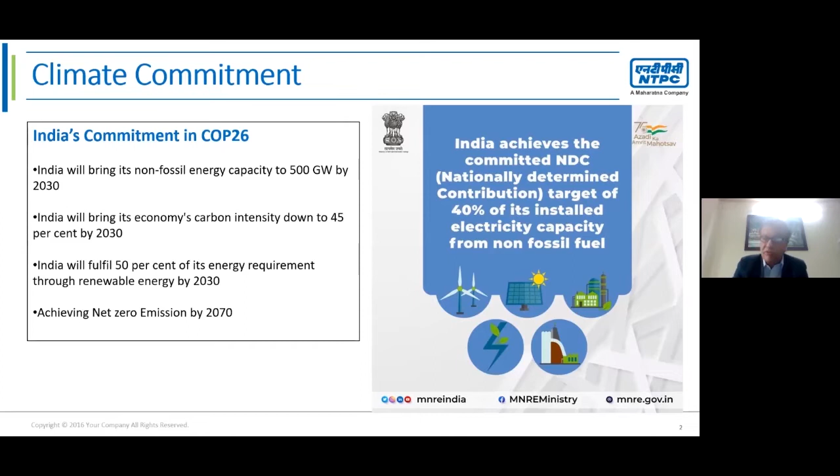Now, if we see the two charts, on 31st December 2021, we have a capacity of 392,017 megawatt of plant all over India, where 53.4% is coal, and solar, hydro and wind together come to around 40%. So that is the point. For renewable energy, we consider hydro also.

And if we see the right side, 2030, in a 10-year period we'll have a total projected capacity of 817,254 megawatt, out of which coal will be around 32.7% odd, and solar and wind will take a huge chunk. So that is the target.

So the challenge is that solar and wind are highly unpredictable, intermittent power sources. So we cannot depend entirely on solar and wind unless and until some energy storage technology innovations take place in future. So we have to have some other power sources. That may be coal, that may be gas, that may be other ways, say biomass and others. So that is the situation right now.

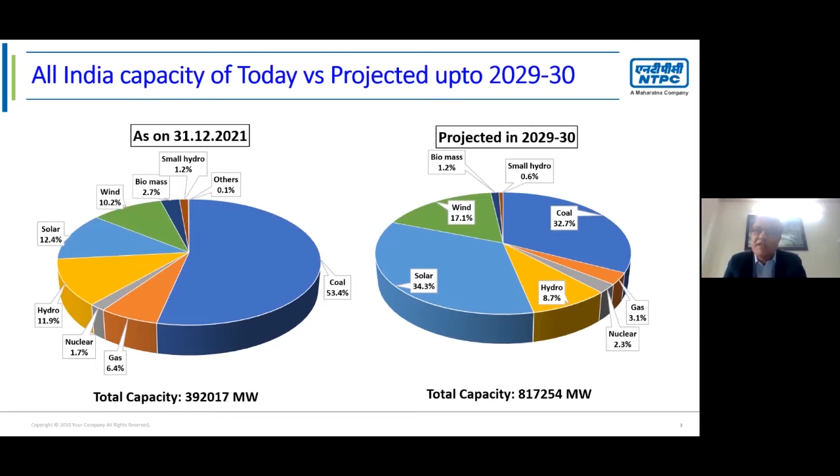But in the Indian context, because we do not have sufficient hydro capacity and gas is not available, we are heavily dependent on coal, and we will depend on coal in future also. So this is a classical chart, given in the recommendations of a Central Electricity Authority report, where it is shown for a given day in the month of, say, July, August, when RE power is at its peak; both wind and solar generally generate maximum during the rainy season.

Now, on a particular sunny day, if solar power is at its peak, the orange line shown in between reaches its peak at 12 hours, during noon, and during that period we have to keep our coal generation, shown by the black curve, down to manage our total energy demand. So the point is, maybe at 7 o'clock in the morning we have to reduce our coal generation, ramp it down, and keep it as minimum as possible during 12 or 13 hours at noon. Again, we have to ramp it up. So that is the classical duck curve.

And given that particular curve in mind, what are the doables for coal plants? We have to ramp down and again ramp up. We have to make the unit run at a lower minimum load, and in the process, some of the plants having lower capacity, maybe 150 megawatt and less, some of the old inefficient plants, are to be retired or subjected to two-shift operations.

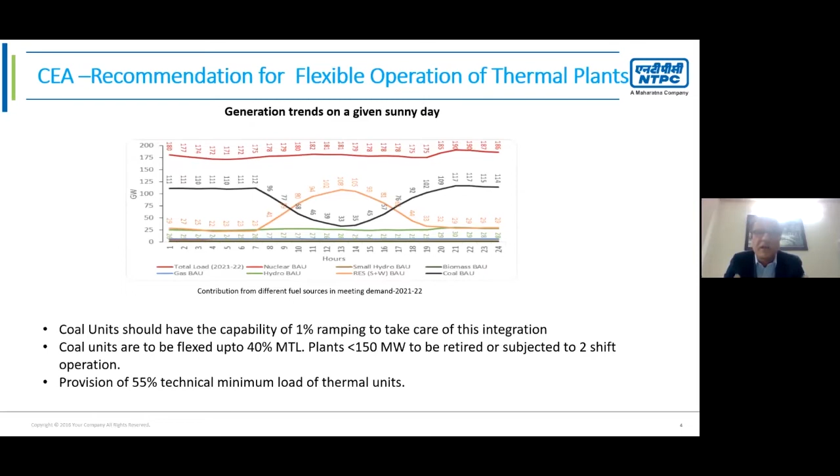And the third component is essential: the provision of at least 55% technical minimum load. Even now, our central generating stations, ISGS stations, are operating at 55%, but some of our state GENCOs are operating at a higher loading factor, so these challenges will be further intensified if they do not come down. So that is the point CEA had mentioned in the report.

Now, to adapt to these situations, to acclimatize with the flexibilization process, what we have done so far in NTPC is that we have taken trial operations in different units so that our people are well trained and mentally adapted to this flexibilization process, in front of some of our international experts like German experts, GE, USAID, all those agencies.

In front of those agencies and experts, we have taken some of the trial operations for minimum loading operations and with higher ramping. We have even taken the support of J Coal in the case of our Vindhyachal unit. So we have taken a series of demo trial operations in front of those expert associates, and from that, we have learned a lot.

And EPRI USA, they are also a pioneer consultant agency, have given us benchmarking studies where we have identified the gap and the intended O&M practices required to follow because of these flexible operations. So these are some of the studies we have done.

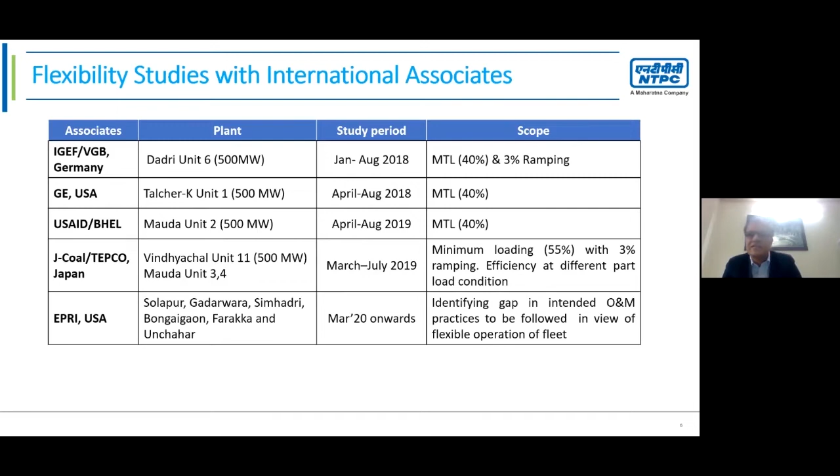And from those studies, we have observed that during these minimum loading or flexible operations, we can face the challenge of flame stability, because when the unit runs at, say, 40% load, with the coal we are firing in Indian conditions, with lower GCV and sometimes very low VM coal, combustion and flame stability will be a great challenge. That is the first challenge.

The second challenge is when the units are running at lower load, the steam flow through the boiler will be less. It can be subjected to high heat load, and as a result, boiler tube failure can occur. When the units are run at a lower load, the draft power will be less. As a result, there may be chances of ash deposition in the boiler pressure parts areas.

And taking all those things in mind, there will be a crisis of process control, with respect to temperature variations, parameter variations, metal temperature variations. So those are to be controlled. And the variations of coal quality: sometimes the coal we are receiving is varying in nature. And finally, thermal fatigue. So these are the challenges we have faced during the trial operations.

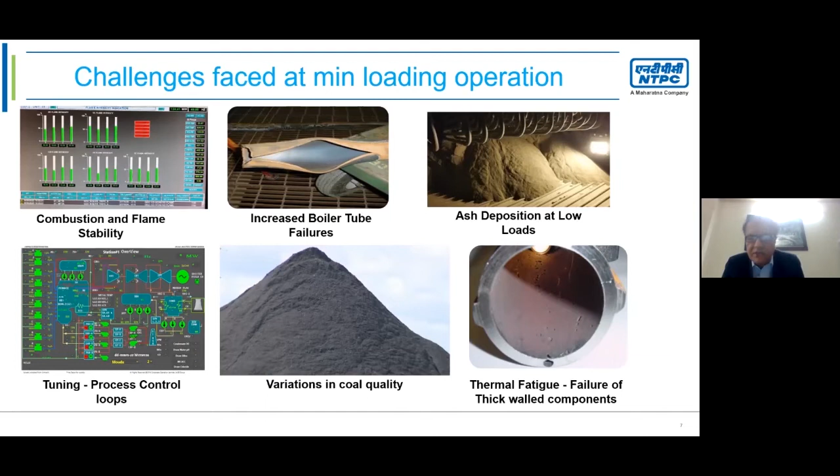And if we convert it into parameter terms, I am a little bit technical, but please excuse me, because it is the WBPDCL, the same generator fraternity I am talking with. That is why I am touching those points in greater detail.

The excessive fluctuations in steam temperatures, the high drum level swings during ramping, the flame disturbance during ramping and minimum load operations, occasional furnace pressurizations, sometimes the stalling of PA fans, and low boiler flue gas exit temperatures, which can lead to acid corrosion if it is maintained like that. So these are some of the critical areas we will face when we run the units at minimum load.

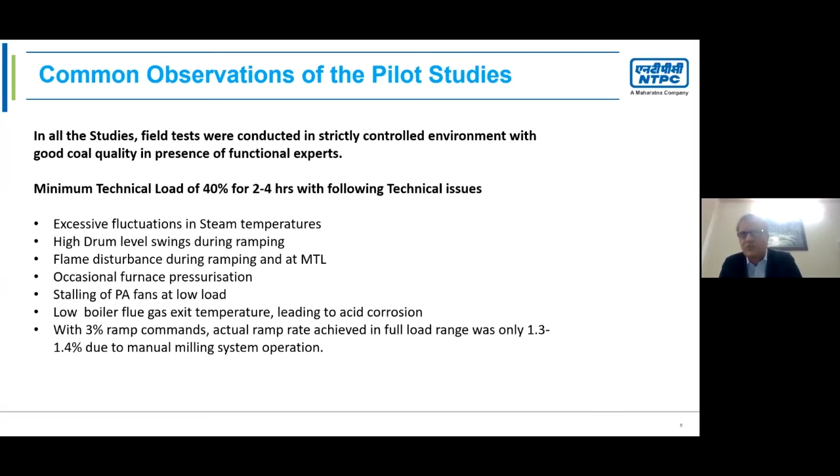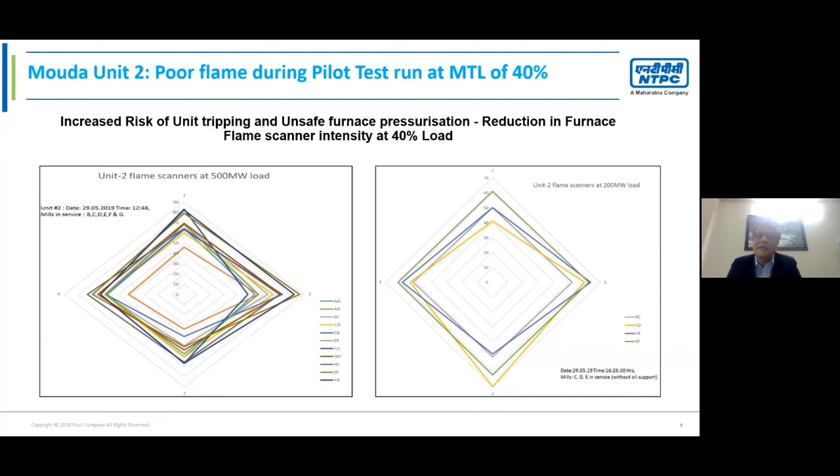Now, just giving you some overall perspective. This is a particular study taken in Mouda, where the 500 megawatt units running at 6 mills operation, the flame scanner positions are like that. But when we come down to 40% load, we cannot run the unit at 6 mills, of course. We come down to 4 mills, even below that, 3 mills. Now with 3 mill conditions, the flame is shown like that. There is some reduction in flame intensity, and this is a huge challenge.

Then in Talcher, we have taken trial operations, where we have observed that the main steam and HRH steam temperature fluctuation is huge. It should not be more than, say, 8 to 10, 12 degrees centigrade, but it is more than 20, 25 degrees centigrade. And during ramping and lower load operations, our metal temperatures are also crossing the limits. So these are the areas where we have to take control.

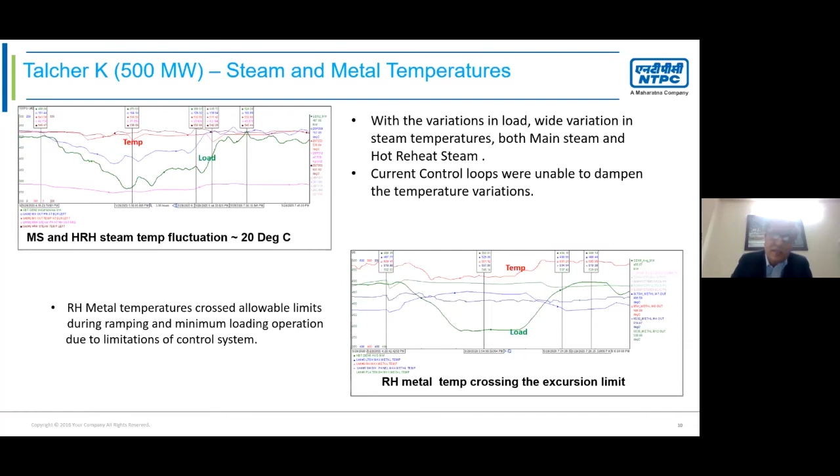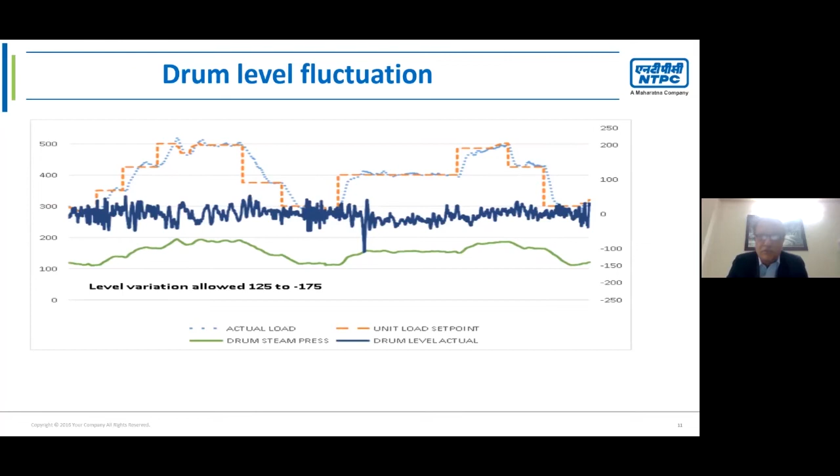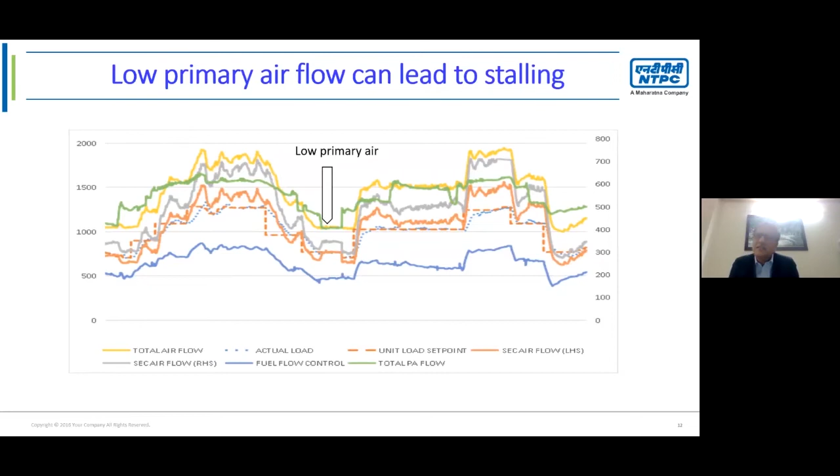Drum level fluctuations: in the case of 500 megawatt units, the TDBFP recirculation valves of the on-off type are very difficult to handle when the units are running at lower load. Sometimes it is closed, and as a result, there may be huge fluctuations. And of course, at lower load, the primary air fan can be stalled. So these are some of the critical aspects we have observed during that particular trial operation.

And finally, the solutions we can think of to eliminate all those situations are controls which are predictive type. The main steam temperature control classically available in our units is basically reactive type. That means only when the temperature goes high or goes down is it controlled through spray or other mechanisms.

But the predictive steam temperature control will predict; machine learning applications will be utilized, and based on the previous trends of temperature rise, it will control proactively. So that sort of advanced process control is to be introduced to control those steam temperatures. Similarly, the reheat temperature also. Modulating type recirculation valves are also being deployed in BFP to avoid drum level fluctuations.

The milling system is very, very critical. As we have explained, the type of coal we are handling, the variations of coal, and the number of milling operations are to be optimized, because otherwise there will be skewed primary air to secondary air ratios, and that will create a problem in combustion.

But to eliminate that, we have solutions like automation of milling and mill schedulers. That means the mill scheduler will decide in which mill how much coal is to be loaded based on the different combustion parameters inside the furnace, and accordingly run those mills. So the mill scheduler may be the best solution to deal with those situations.

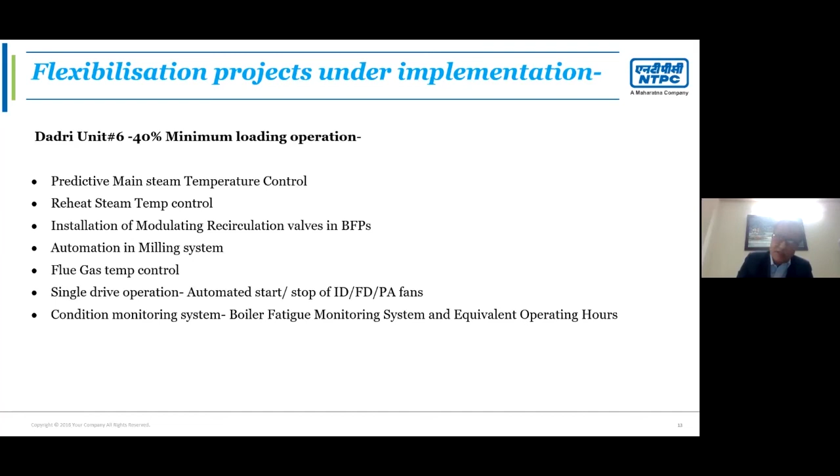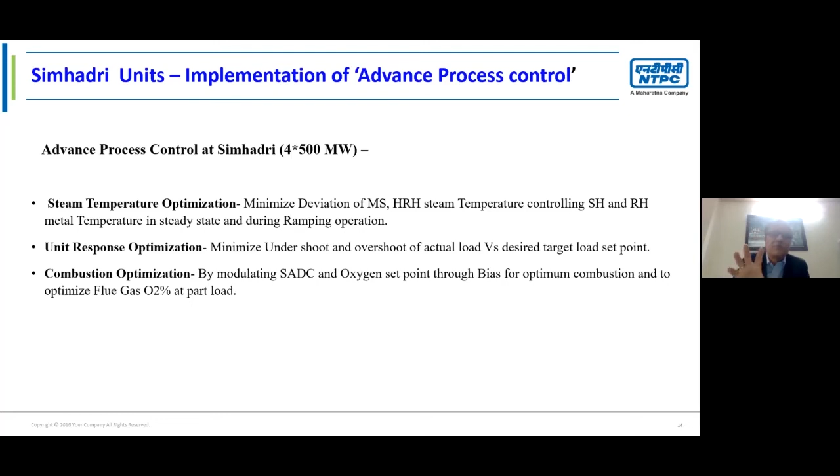And another point I'd like to mention here is that we are installing boiler fatigue monitoring and equivalent operating hours in turbine to see how this ramping and lower minimum load are affecting our plant life. So these are some of the solutions, based on our trial operations. And in Simhadri also, we are utilizing some advanced process control, where the applications are limited to temperature, unit load response optimization and combustion optimization. So basically through process control we are trying to manage at Simhadri.

And this is a flow chart I would like to put before you all, as a generator, of the three basic essential elements involved. The first is people, because we have to adapt to the situation. The first and foremost is creating the mindset, accepting the fact that we have to come down to a bare minimum load, accepting the fact that we have to run a 500 megawatt unit with 3 mill operations. So that is a change in mindset. And for that, what is required is exposure, trial operations, and training of the people.

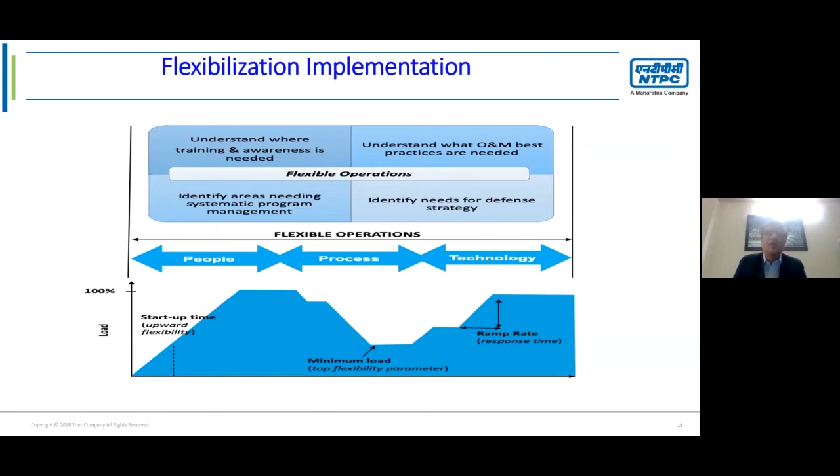The second, the process. The most important fundamental aspect of dealing with this situation is process control, advanced process control, which is to some extent proactive type control. And third, the technology, maybe new technology like automation of mill schedulers and some other engineering applications. When we conceive during the design stage, technological interventions may also be very much handy. So these are three different criteria through which we can control the flexible operations in our thermal plants.

Now, at the end, I would like to conclude with 4 key points. The first point is coal-based units are to be flexibilized. There is no other option. Our previous speakers also told this categorically. What are those? The minimum load may be 40%, high ramp rate, and frequent startup. So these are the 3 essential elements of flexibilization.

The second is there will be cost associated with flexibilization. Part load degradation: when you run the unit at lower load, our coal consumption will be more and there will be degradation. Our startup cost because of frequent startup and shutdown, then life consumption cost due to this flexing. And all those costs are to be adequately compensated to the generators. Otherwise, a generator cannot go for these flexible operations.

So the third step is plan and prepare. Prepare for competency development, introduce advanced process control and new technology interventions to minimize the life consumption. The life will be consumed because of variations in temperature, because of fatigue and creep associated with those operations.

Then last but not the least, the other speakers had also categorically told that at least for another 2 to 3 decades, the coal units will stay here. This is for sure. So we have to adopt it. We have to welcome it and we have to acclimatize to it for better flexibilization of coal-based units to accommodate larger and larger integration of renewables.